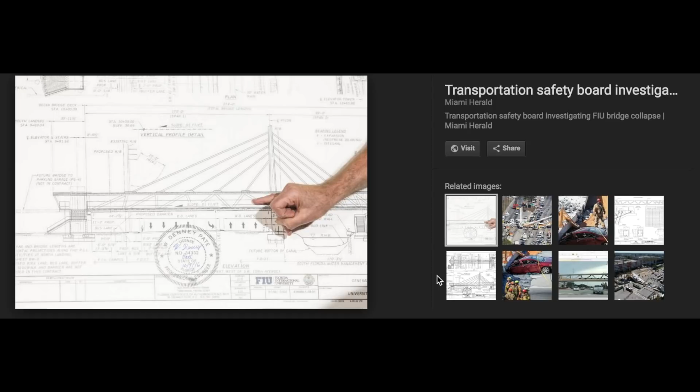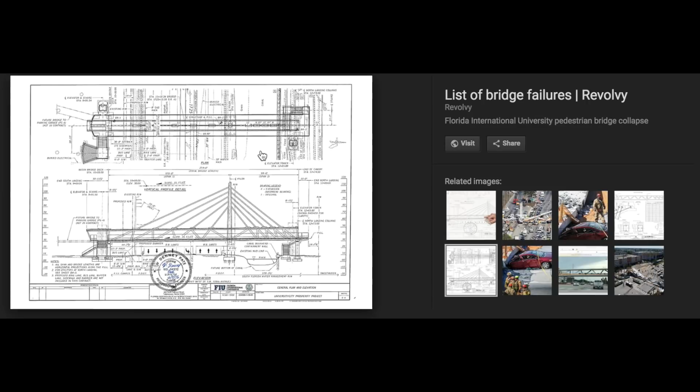Now the NTSB is supposed to be investigating this scene, and it appears that they're putting out misinformation. They had to know that these aren't the current plans, the 12/9/16 plans. And if they didn't know they had the wrong plans, this would be impossible to investigate properly, because all the details you're looking at with the old plans would be wrong. So you would be thinking everything's okay, you wouldn't know what was wrong, and all the evidence is gone by the time you get the right plans. I want to know if they got the right plans, if they have them now, and when did they get them?

So now we see the plans are April 2017. So the NTSB put out plans showing 16. They put out old plans, or led us to believe to go look for these old plans. Either they were given false plans. So how can we expect the NTSB to do a proper examination and be qualified to make any statement if they can't even figure out how to get the current plans?

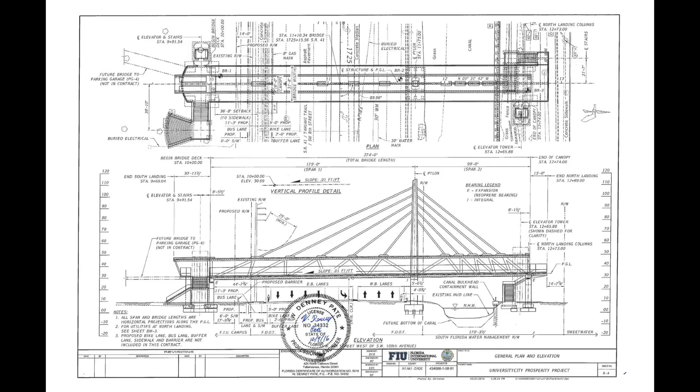You know, it's amazing that they had to send the airplane expert down there to investigate a bridge failure. That's brilliant. I'd be real great at an air crash scene myself. Put me in charge. I'm being facetious.

Terrible. This is terrible, and these aren't even the full current plans because we still got rebar and not post-tensioning. So the FDOT is not putting out the correct plans either. They need to update what they're releasing to us with the amendments or addendums.

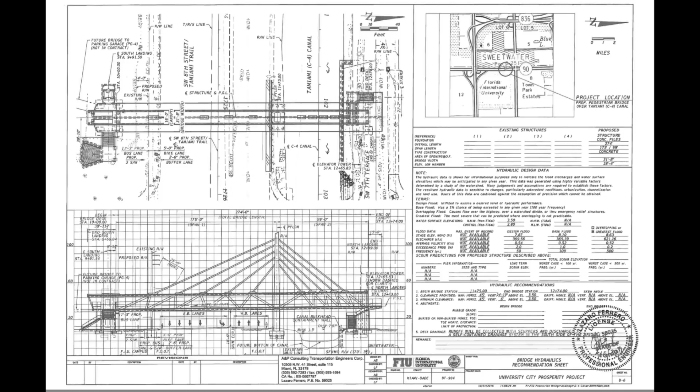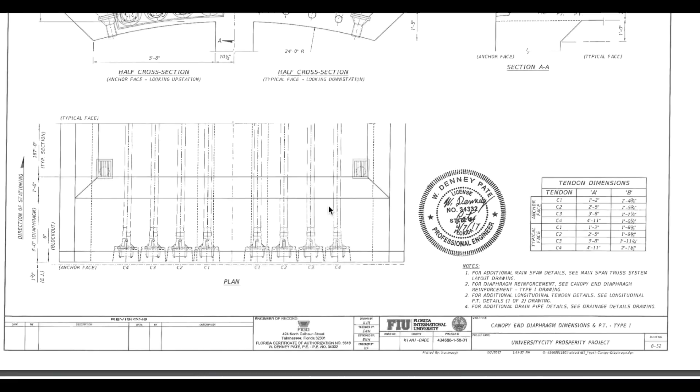Let's just jump right into the canopy. The canopy appears to have 4 post-tension members, and there's so many awesome things here. I'm really excited about being able to have these details now. These are the stamped drawings, the latest stamped drawings of 4/7/17. Now the latest stamped drawings that I have in my possession at this point. This is the canopy, I got to confirm this with you guys. There's 8 members up here. The first drawings we saw, the rendition had 6, 3 and 3. It appears at this time the update has a total of 8.

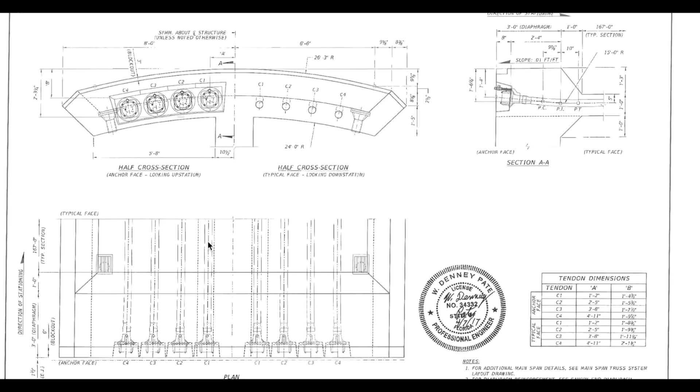And remember, in the middle are the nodes, the bar blisters. This makes this canopy structurally much more sound. And what's even more awesome, which I'll show further in these details, and I'm going to do a few videos on this because I actually have to get to work, but I wanted to put this out this morning for you, is that they addressed some issues of the load being at the bar blisters. Look out, my converts that aren't quite converts. Maybe this will make you more of a convert.

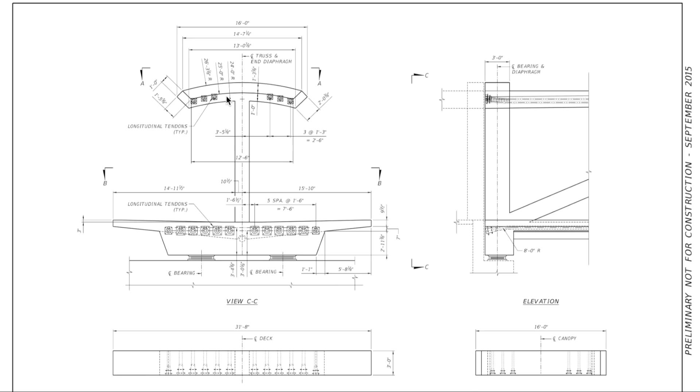These are the original drawings. As we saw in the previous image, they now have this as 8 post-tension members and not 6. As you might recall, I've always had this as a weak point, with this blister here forcing out. My thinking is that the first draft, the engineer stamped it, it went forward to the next engineer that was supposed to inspect it for quality, and he or she or a team looked at it, and they said, we don't like this area up here, let's increase the post-tensioning members here and here, increasing it by a significant factor, adding 2 more members. Okay, we're moving on there.

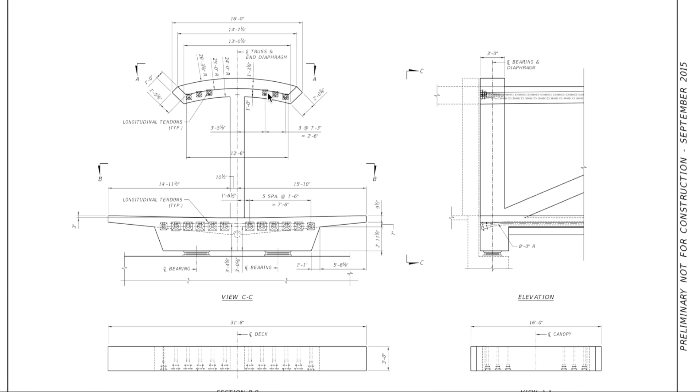So you guys can see that this has always been something I thought was wrong, and I don't want to pat myself on the back, but this would have been Pate's original plans, and he stamped it already at this point. These are stamped plans. So I don't think that he went back and said, you know what, I should add more there. I don't think that doubt came. I think it came from the second inspecting engineer, or firm. And they said, this node, we need to address this load path up here more. So you guys follow me on that. That's always been my problem up here, and it still is.

But let's move on. So here's the directions of the post-tension cables, and here's a grout tube. This is what the grout tube looks like. It gets inside here and grouts down this tube. As you know, they're ungrouted. Ironically, I've only been able to breeze through this, and I have not been able to find the detail where it says grout the members.

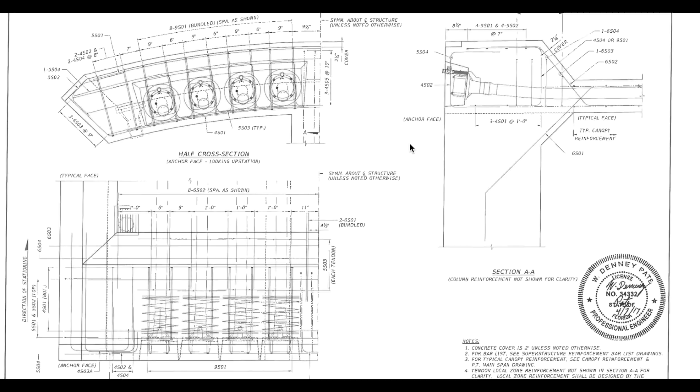So this is Denney Pate. Now, we're going to have to backtrack, a lot of us, on a lot of things. At least my position is that this had a lot of hands of a lot of engineers, which I actually think is a positive thing, including, which I'll get to, and I guess I should jump to it now to give away something that I was working on before the guy sent me these plans. Now I've got to redo a video.

Company spokesman Michael, well, I can't say his name, wouldn't say exactly what the crew was doing when the bridge collapsed, but he confirmed the workers were providing installation support for our products. This is a different quote than I found earlier where they said they were post-tensioning, I believe it was. Documents from FIU and consultant Bolton Perez and Associates, obtained by the Miami Herald. So it appears that they had some other engineers on top of this.

Show that Structural Technologies LLC, VSL, was paid $439,000 for post-tensioning work. Now, we don't know the details of this. This could be the entire post-tensioning of the entire bridge. This contract could have existed beforehand, not as a result of a crack showing up after the fact.

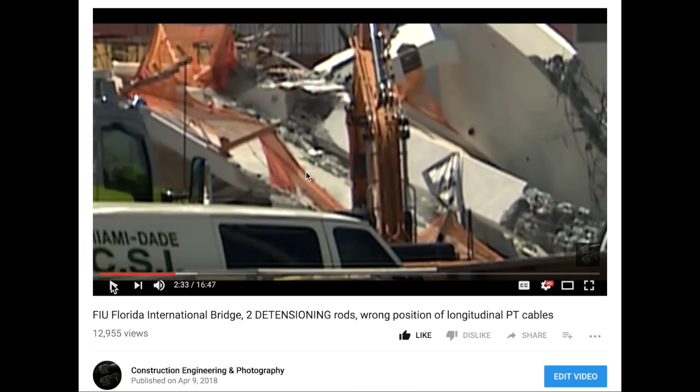But what I do find amazing is that I showed in my previous video, while the bridge is still supported with the dolly, the workers saying that before the dolly is removed, they're going to detension some post-tension members. Video I posted April 9th talking about the detensioning rods. It was supposed to have been done already, and that's part of the plans. They were supposed to be detensioned, but not removed.

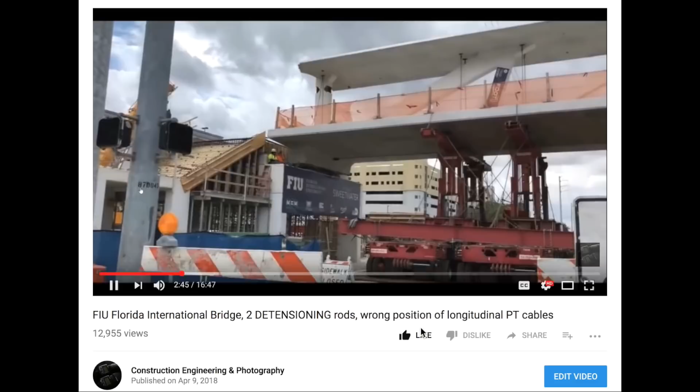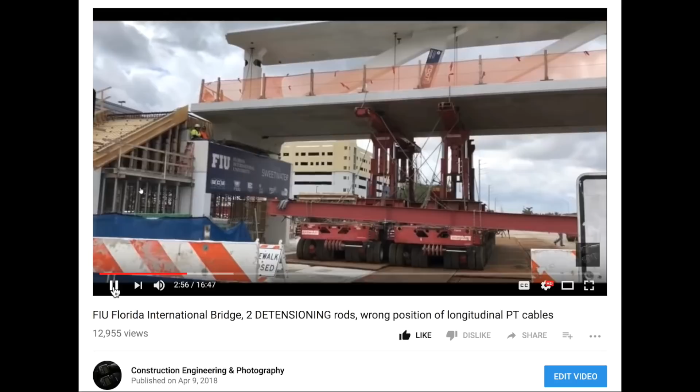The bridge now has been in place in its final position, so we're going to be getting ready to dismantle and remove the SPMTs from underneath the bridge back into the staging area. Right after that, we will continue with the demobilization of all the rope leads and detensioning of the 2 bars on top of the bridge. And right after that, we will be reopening 8th Street to the...

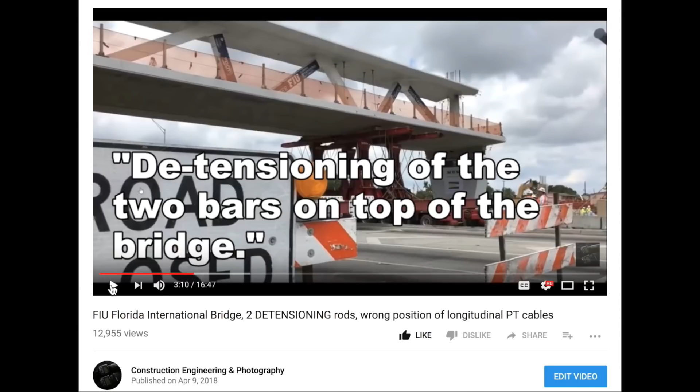Okay. So detensioning 2 bars on top of the bridge. That's part of the steps. And now, I can't find a video, maybe you guys can find it, or any data showing they detensioned at that point before they removed the, well, I guess they loaded it. And I can't find where they removed it beforehand. But he makes it clear before they open the roadway, they're going to detension. So obviously, this guy knew that was an issue that should be addressed before the road was open.

And I'll back it up again. Note 2 things. He says 2 bars, not cables. Also, he says he's going to do it before they open the roadway. So they clearly had safety in mind, and the bars were to be detensioned before the roadway. So now remember that I didn't have the new plans when I made this video, so I was just working on what my experiences are.

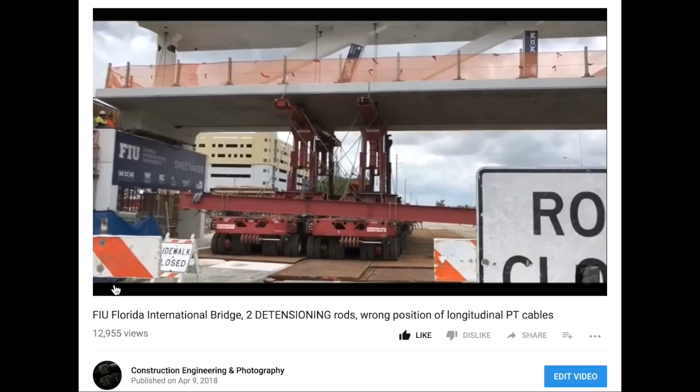The bridge now has been in place in its final position, so we're going to be getting ready to dismantle and remove the SPMTs from underneath the bridge back into the staging area. Right after that, we will continue with the demobilization of all the rope leads and detensioning of the 2 bars on top of the bridge. And right after that, we will be reopening 8th Street to the...

Okay, they will reopen the roadway after that. So it appears that they knew the hazard, as I stated in this video also, and they just went. They ignored their own procedures. Unless you can show me a video where it comes forward, then I retract that statement. Unless you can show me them detensioning the 2 that he was referring to.

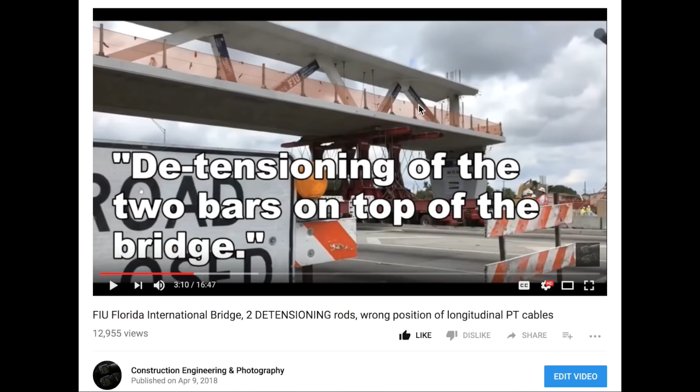He did say 2. So if they detensioned 2 down there, or anywhere, then all bets are off. They technically can say those are the 2 we were talking about. But apparently these are the 2 that need to be detensioned as the drawings currently show, the 2017 stamped drawings. Yet I could not find a video showing them doing that while the dolly was in place. So you guys are so awesome. Maybe you can find that for me.

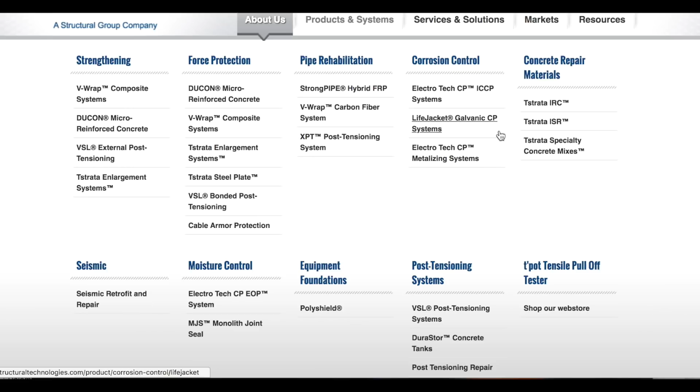I'll work it out. So this is Structural Technologies structural group. They specialize in bridge repair, etc. And I'm going to jump around and cut to the chase here. I tried to find that jack, the hydraulic jack that they use, on their website. I could not find it. And awesomely, I share this stuff with you guys, and you might find it. Someone that's really into this might find it.

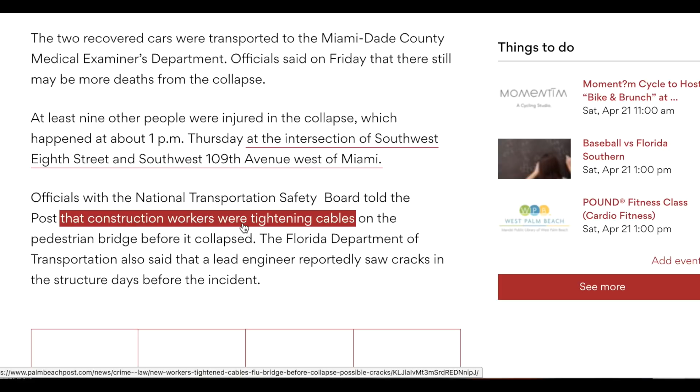So here's an article from PalmBeachPost.com. Right there. Officials with the National Transportation Safety Board told the Post that the construction workers were tightening cables on the pedestrian bridge before it collapsed.

My videos take a lot of research, and in this case, I have the new stamped plans. So I have to go over every single thing in my mind before I make a post. With that said, I'm making this post before I finish all my details.

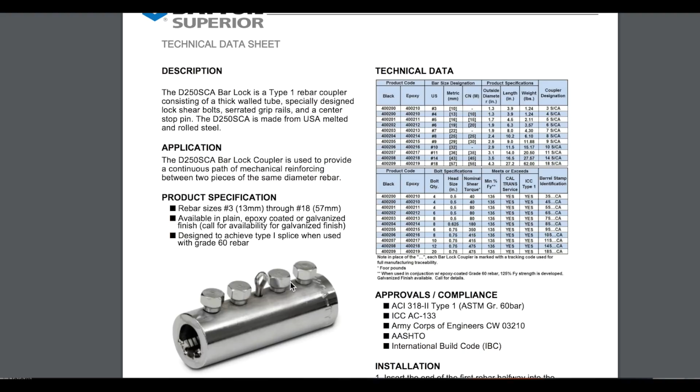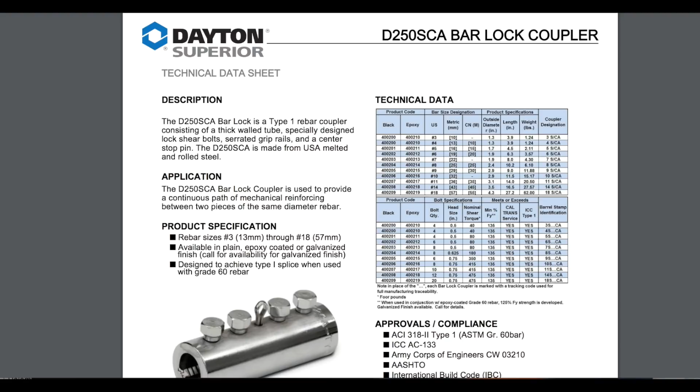Now, you can torque this to a certain torque per the manufacturer's installation requirements. And you now made it so you can almost get any worker to do this, but you still need somebody to verify the torques. I'm not saying that caused a failure. I'm just saying that this is how Pate did an awesome job on that. So, you know, we're not throwing everybody under the bus.

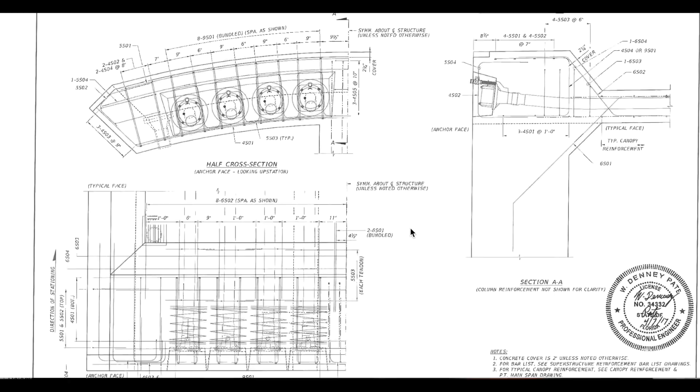And as I've always said, I am the type of person that will go with the data. So this data now is getting pretty strong in the form of this bridge. I'm not a fan of their step processes of not having all this post-tensioning in there or not resolving that temporarily. And I have not read all the plans. Maybe they did have some temporary post-tensioning going on and then removed it. I don't want to keep this video long.

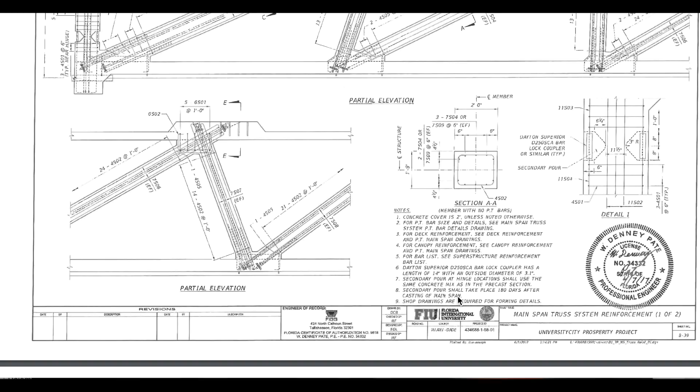Okay, I've highlighted here B39 under Section A. Secondary pour shall take place 180 days after casting of main span, which is awesome. They show that they have a pour delay. I mean, this is beautiful for concrete to mature. That resolves that maturity issue of pouring too soon, as everyone's always calling it green concrete.

I don't get that. Concrete can get the PSIs they need within 7 days. And I addressed that in my videos, but they addressed it in here somewhere, that it stated something like it'd get to the PSI within 7 days, whatever it needed to start a preliminary post-tensioning. I believe that's ideally what the preliminary post-tensioning is for. You like to get your concrete under some post-tensioning typically soon.

It shows that number 11 does have post-tensioning bars installed. As you see here, this is the detail to help you guys understand this. You see the E and E. This is this direction. This means it's this member, and you would find EE over here. It's member number 11. So EE, you go here, and you see the cross dimensions, 1'9" by 2 foot. This appears to be center line of the post, and high and low within these. And you can see the details again here. These two will be in equilibrium.

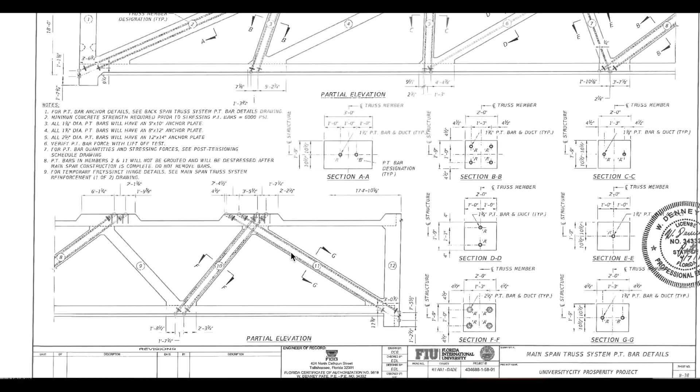Once the deck was in place, as I read quickly in these drawings, these were going to be detensioned. Number 2, far left, if you recall. Oh, I have it here. Number 2 and number 11 were detensioned. Note 8: post-tension bars in members 2 and 11 will not be grouted and will be destressed after main span construction is complete. Do not remove bars. So it appears this is very critical.

So the main span construction, when is it complete? That's an interesting question. Before it hits the dolly, after it hits the dolly, or do they mean after it's complete? Does this complete mean installed at the location?

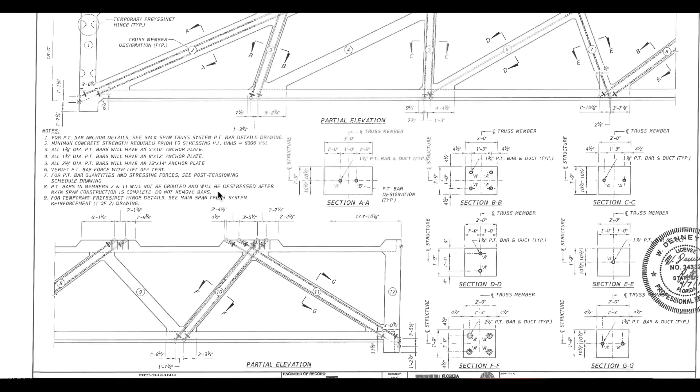All right. This is a hinge effect in concrete. See main span truss system reinforcement. This is the thing I referred to you guys as a way to have expansion, etc. Have movement abilities. Let me address the kick out, as the question arises a lot. This has been kicked out the backside, starting the movement first in the collapse of the bridge.

This post-tension bar creates compression. There's the one anchor plate on the bottom end. As you're pulling on the top end, you're creating tension inside this member, and when I say member, I mean this post-tension bar. When you're creating tension inside that bar, you're creating compression on the member here. This is the concrete member.

This is a force going in. This force is being controlled by this nut on this plate. The force is in this direction. It's not a force in that direction. So post-tensioning would not create a force in that direction. If it were to break at this point, all the forces would still go forward. It would still go towards the upper deck, not down this direction.

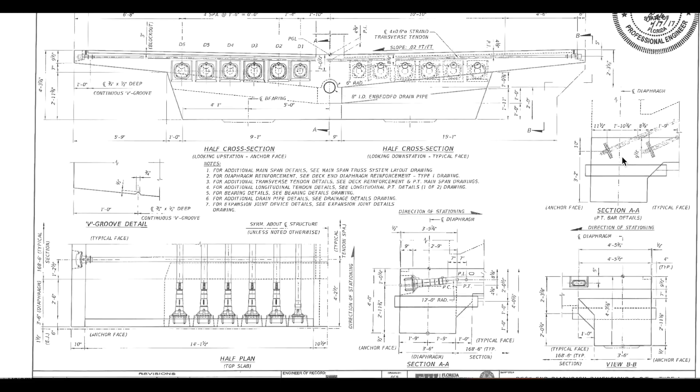So for your knowledge, all these little approach angles, see how it's not straight? All of this counts as positive or minus for the post-tensioning you're doing. Let's look at the transverse post-tensioning. This is transverse. These are longitudinal, the longer direction of the bridge, and anything going across them would be transverse. As you can see here, there's the transverse. I've already spoken to this in other videos.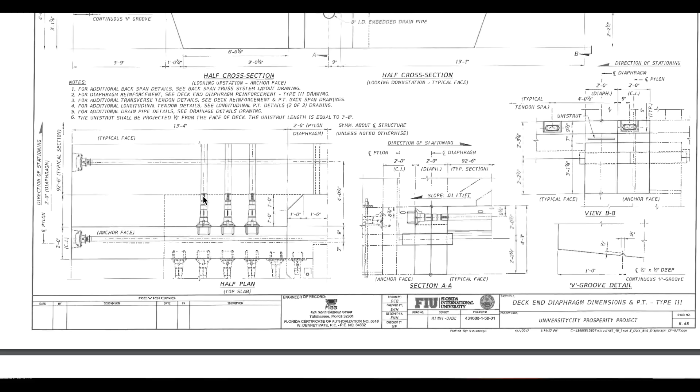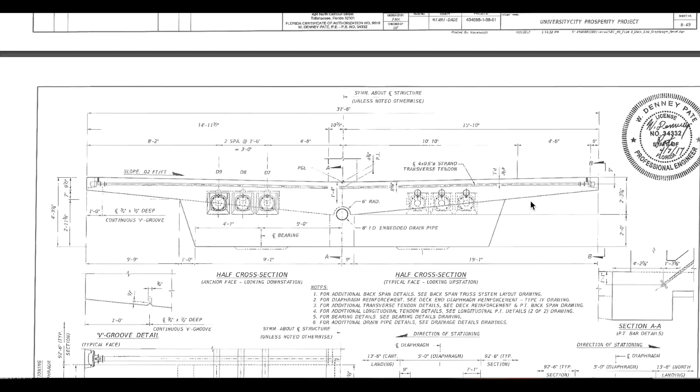These are now the stamped plans. As you can see here, they were called for. So to change this to rebar, there is another set of plans that would allow the detail to be changed. Another detailed plan showing this would change to rebar. Okay, as I always talk to you guys about reinforcement and conflict, here it is on their plans with the PE addressing that. I said that in one of my other videos, the conflict of materials. I think I did a whole video about the one bar being in line with the post-tension member.

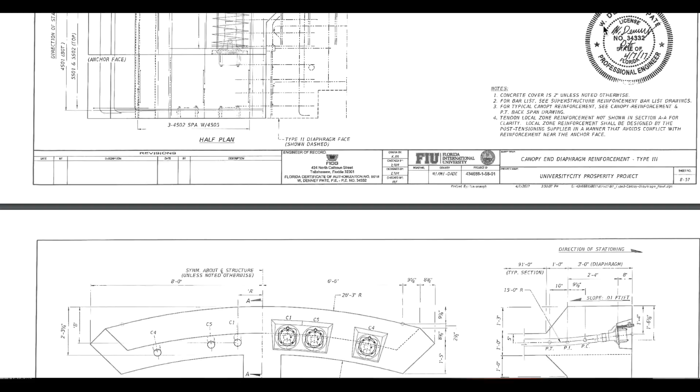Well, they're making it clear here that tendon local zone reinforcement is not shown in section AA for clarity. Local zone reinforcement shall be designed by the post-tensioning supplier in a manner that avoids conflict with reinforcement near the anchor face. So this is very critical here, that as you can see, they did pass off their post-tensioning details to the post-tensioning supplier, which I think would be VSL. I just spoke about that a few moments ago. VSL, post-tensioning companies, always have the issue here.

Let me give you an example. When you see these skyscrapers built, the glass guy puts the glass in, the glazing it's called. But then there's a glazing contractor that comes along and does the caulking. He's an expert caulker, and they actually insure their work. You might spend $50,000, $100,000 for a building just to have him bond his caulking or insure his work. Because as we all know, water can kill anything, and that is what you spend the extra money for. You just don't go caulk it yourself.

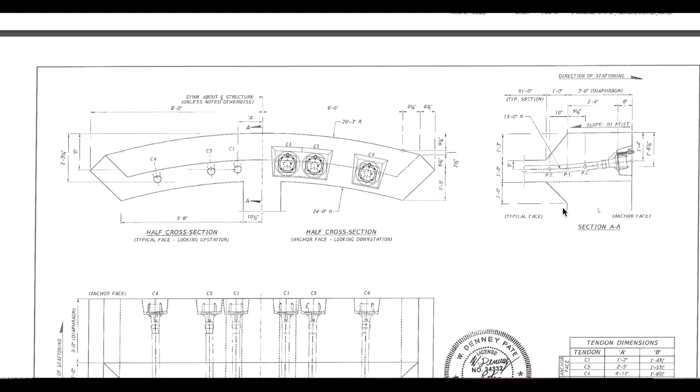Specifically, let's talk about the Dryvit system. Dryvit system is a stucco system that a lot of contractors can install. But when it comes down to the caulking, a lot of them don't hire a professional caulker that would guarantee that and stop the water penetration that causes that system to fail in most cases. That's what it was back in the 80s. So in a compliment to the bridge builder, they've hired outside professional post-tension contractors. They're not trying to double dip, which is great.

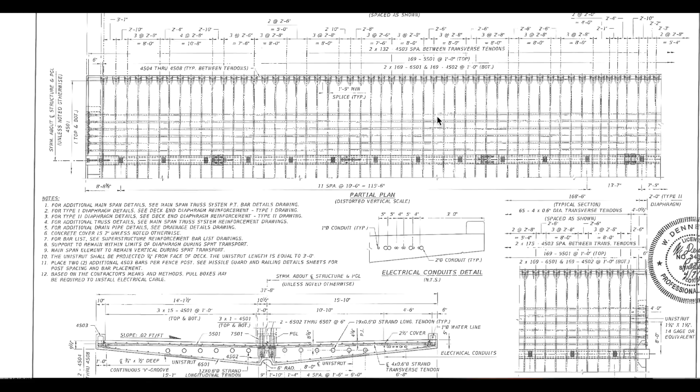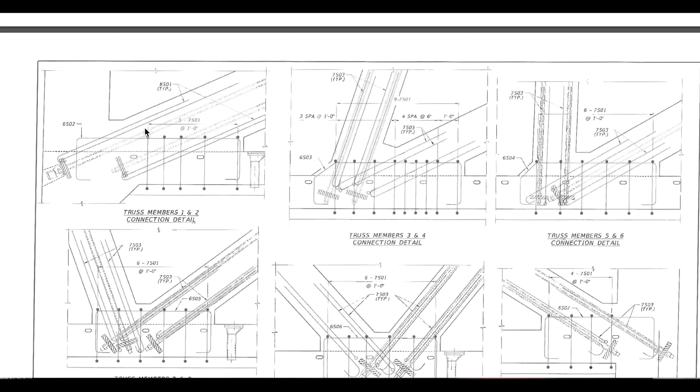Again, we have the post-tensioning transverse members going across the longitudinal members. This was not present in this construction. It's present in this detail. Specifically, I'm looking for this detail down the middle here. That's where the load transferred from the deck down the truss system, truss members number 1 and 2. This is what it looks like at the bottom base of the bridge. This shows how they wanted the detail to be done.

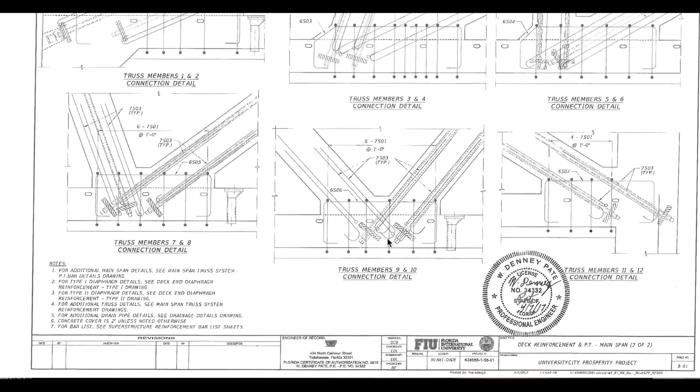Remember, I've always talked about the forces going outwards when you apply the load onto the radius canopy deck, and that there's nothing underneath for that radius, underneath the nodes, the blister bars. I keep saying nodes; they refer to them more specifically as blister bars.

Notice the post-tension cables. There are 3 of them here, and this is a half, so the other half is going to be the same as this, mirroring it, if you will. These loads, see how they jog, and they go along parallel to every blister, and then it'll probably be the same jog on the other side back in.

So when you load this, the forces are created pushing in this direction, countering the forces from this pushing out. This would counter that force coming at each other. So the force is coming this way. And if I could flip my arrow around, it would be coming this way with these post-tension members pushing this way, if you will. And then the forces of the canopy and the radius trying to go outwards, forcing that way. And this would be countering those forces as I see it.

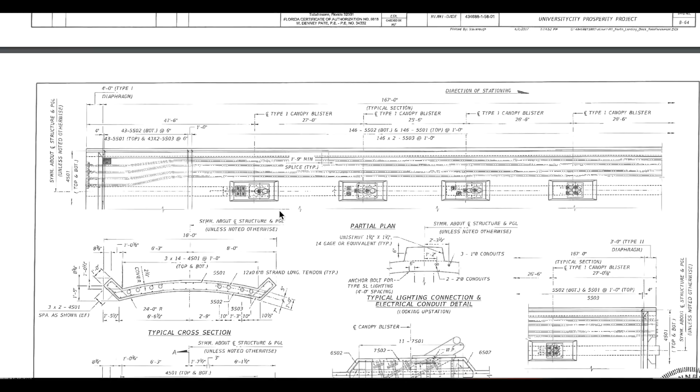All right, so there were only 2 of them in play. That's a lot less countering, or 2 on each side, should I say, and they were varying sizes. Right? You have the 4 members here and the 4 members here, the post-tension cables. As this pushes down, as you can see, it's a radius. It wants to push out. The forces in the post-tension bars in that configuration I just showed here will counteract the forces, ideally, when you're post-tensioning this member, of it trying to flatten this deck out.

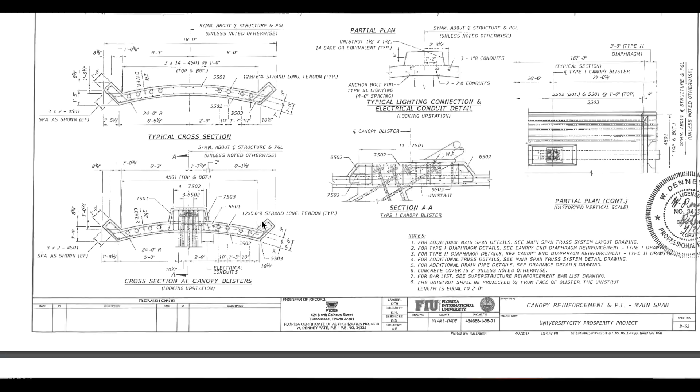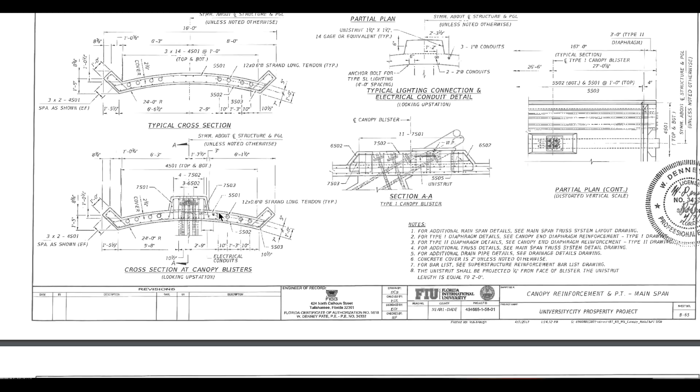This is a camber, if you will, to allow for the way they resolve the camber and keeping the deck more flat, I think. Remember, this bridge has some unique details that are resolved, supposedly, cutting edge. And I think maybe this is one of the cutting edge details. Ideally, I think the crack sent these people on a wrong system. It sent them off their program, and this caused the evolution. And perhaps, and I want to be careful here, VSL was hired to do this post-tensioning to resolve that.

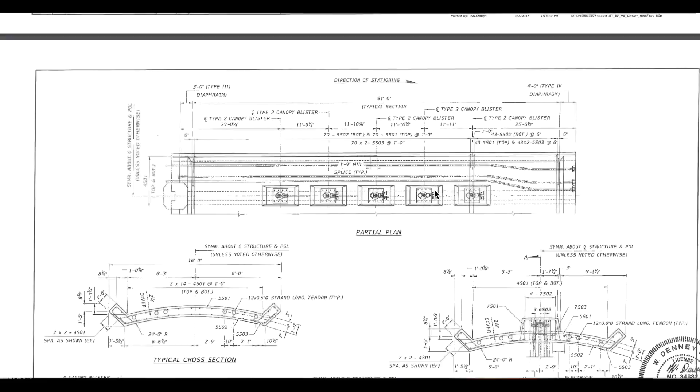This is the smaller span, and you have the 2 members here and the one on the outside. Boy, this begs me to think, did they get these wrong? I just would hate to think it was so simple as that they got their cabling wrong between the 2 bridges. They had too many people for that to happen. I have to think that's just a bad file in my own brain. It can't be as simple as that.

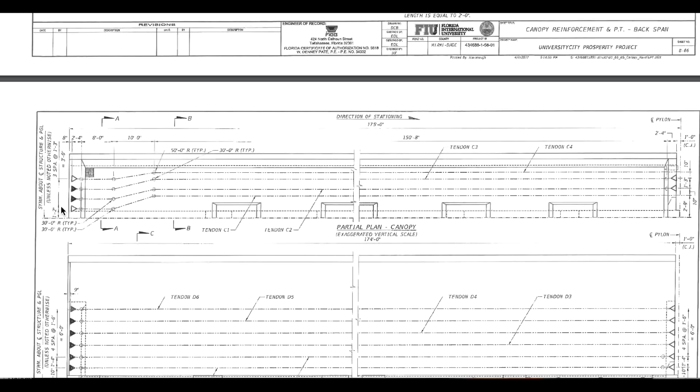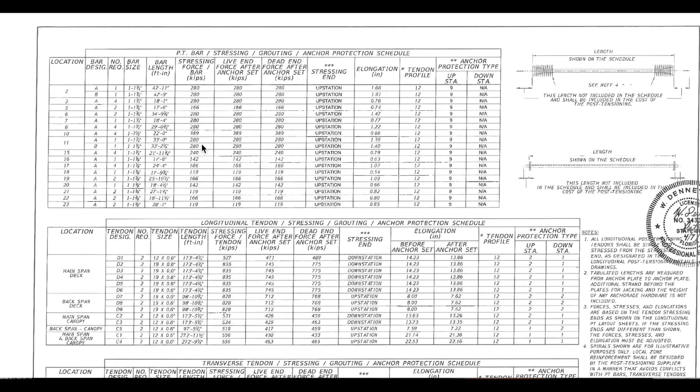So we go back to the 4 members, the long bridge 175, and they were specific here, showing the 2 details. Going on to member number 11 now. Member number 11 was to have post-tensioning done, and all of the post-tensioning on this bridge was designed to be upstation, meaning above, on the top of the canopy. Here's your elongation, and this is awesome detail right there, 1.39 inches.

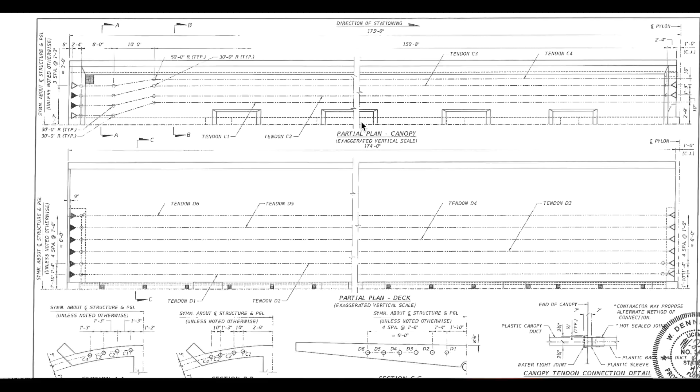In my previous videos, I was stating that the 2 bridges together possibly were going to have 2 additional post-tension members going across from one bridge to the other, tying the 2 together. And I also noted that I didn't like that idea. I just found it created some type of camber or some issue between the 2 bridges.

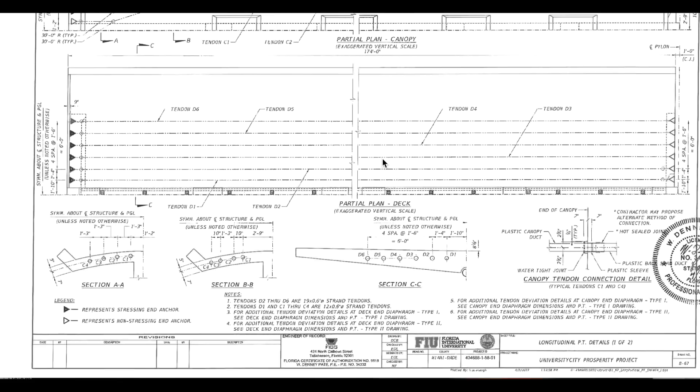Okay, so this bridge, the detail we see, this is as built, I would say, pretty much. This is the stressing end. This is the non-stressing end. So going back to the legend, stressed end, non-stressing end. That means the anchor end. Going back to my notes, I see 2 stressing ends. And let's follow those over. 1 and 2, side by side.

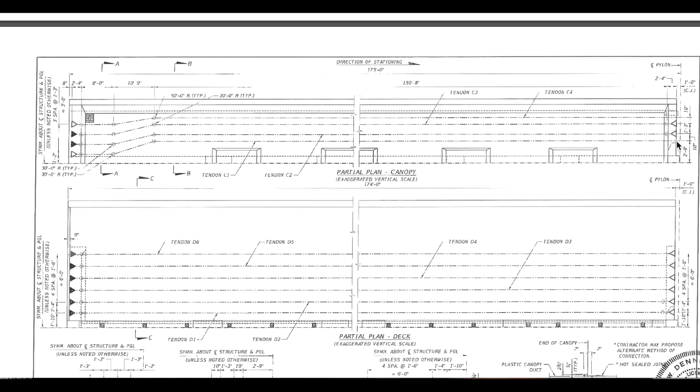And this one might go all the way through, so there's my correction, might go all the way through to the next deck. And that would put us back at those two again, 1, 2, the two pockets. So, yeah, it appears that two of these were going to go through this canopy, through the next canopy, and secure both bridges together. This is WD Pate with the post-tension details. This is not Structures post-tension detail. This is Denny Pate's details on post-tensioning.

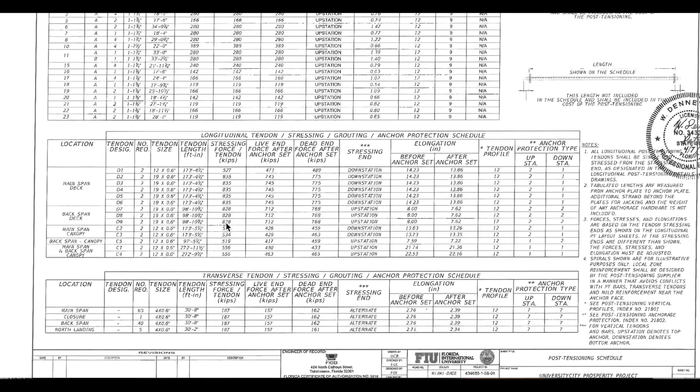Okay, so for clarity, I did find they were going to go through 2 decks. If we look at the length, main span and back span canopy, they were going to do 2 members at 272 feet. And that was going to be C1 and C4. We're going to do the longitudinal post-tensioning of both decks. C1, C4. Inner and outer was going to go longitudinal through both decks. C1, C4. Okay, thank you.